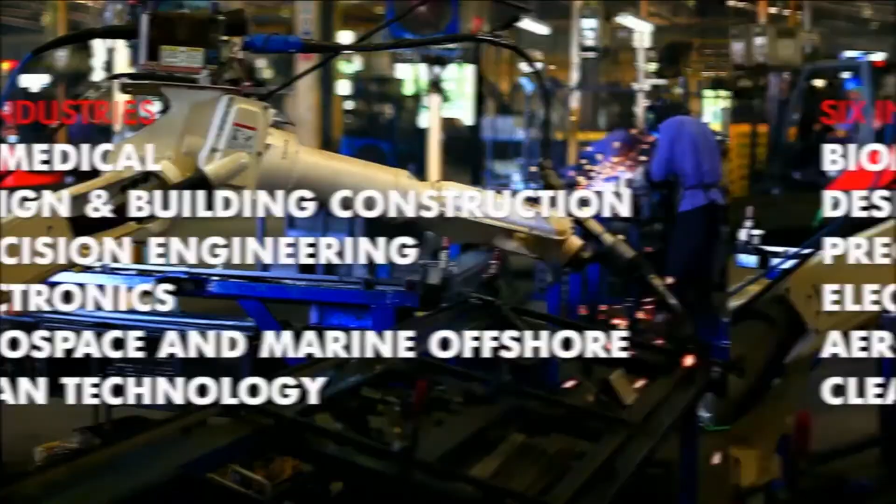What we're working on is developing new materials, new ways of printing, and designing these materials to suit your body part, and then training the doctors to put them back into your body.

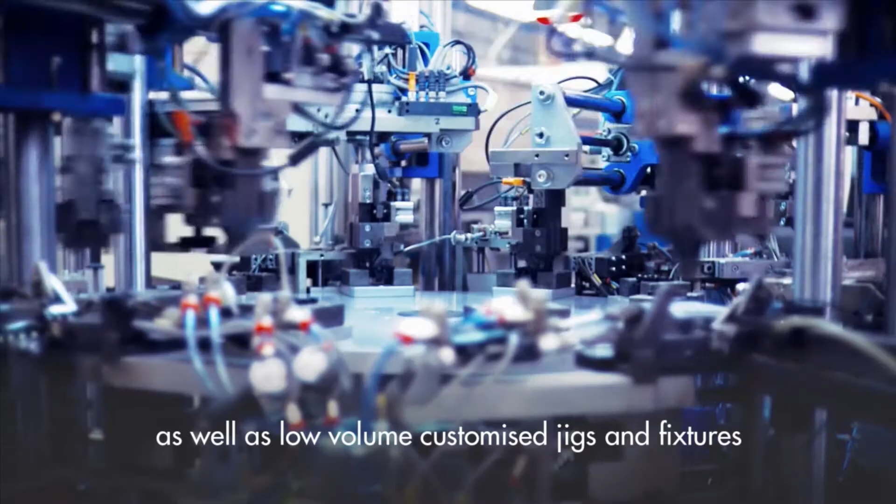AM can be used to make injection molds with conformal cooling channels, as well as low-volume customized jigs and fixtures.

We have already seen door brackets which have been 3D printed and used in aeroplanes. We will also see fuel nozzles that will be used in aircraft engines.

An exciting development is the development of hybrid technologies. This is a combination of both additive and subtractive-based technologies, such as milling.

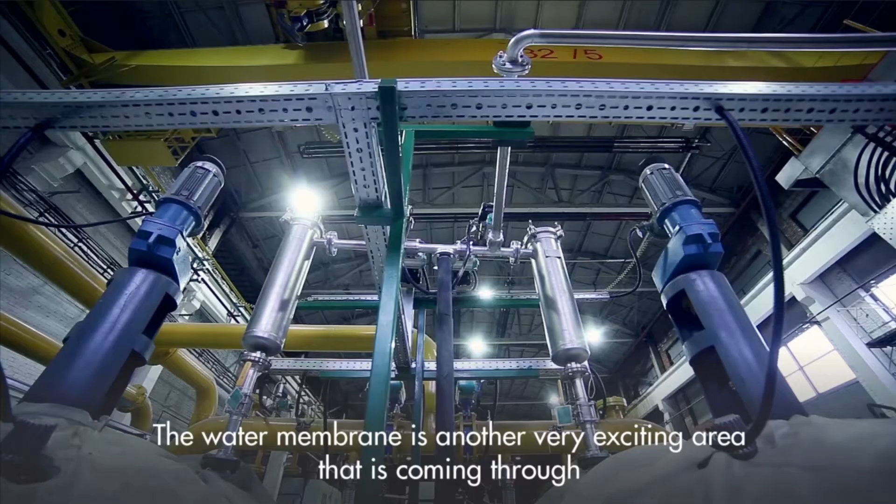Solar panels and wind turbines are some of the emerging applications with AM in the clean technology sector. The water membrane is another very exciting area that's coming through.

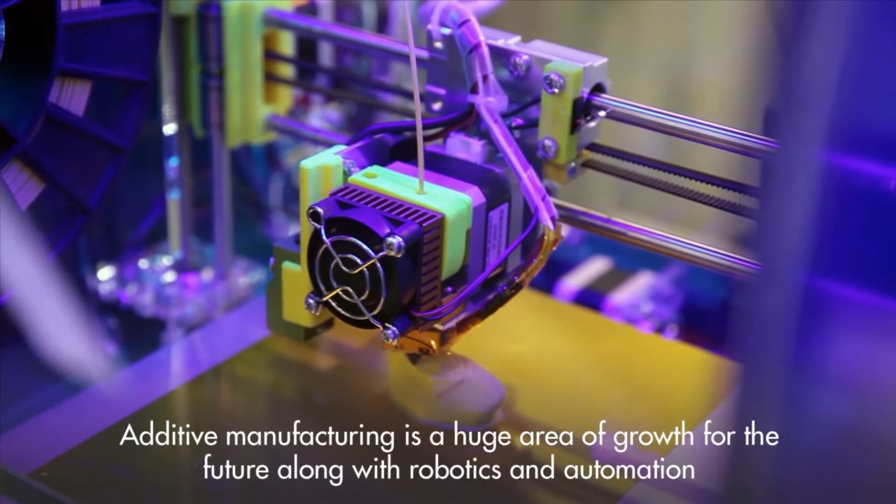Additive manufacturing is a huge area of growth for the future, along with robotics and automation. In Budget 2016, the government announced the Industry Transformation Program. Additive manufacturing, automation, sensors, analytics—these will be the enablers.

AM is identified as a disruptive technology. It has the power to impact lives, businesses, and the global economy. It is a game changer.

The current market size is about 7 billion, and we should see this number triple by the year 2020 to 21 billion.

The AM ecosystem, as we see it, is made out of three main parts: universities that are training students for working in 3D industries and do research; corporations that do prototyping work, actual parts, and scale-down models to train people; and individuals that take advantage of the fact that 3D can do small quantity productions.

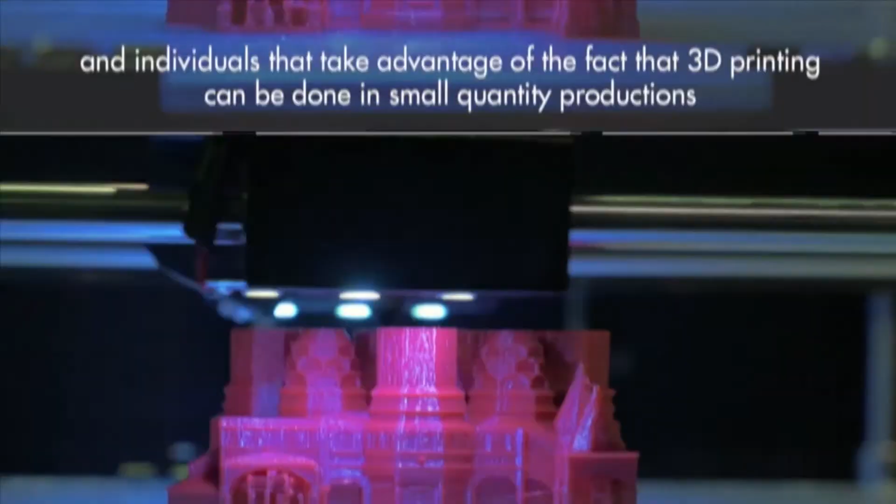It's critical selecting the right applications that are technically feasible and economically viable, then having a workforce that is able to collaborate and innovate to create new applications and solve the challenges.

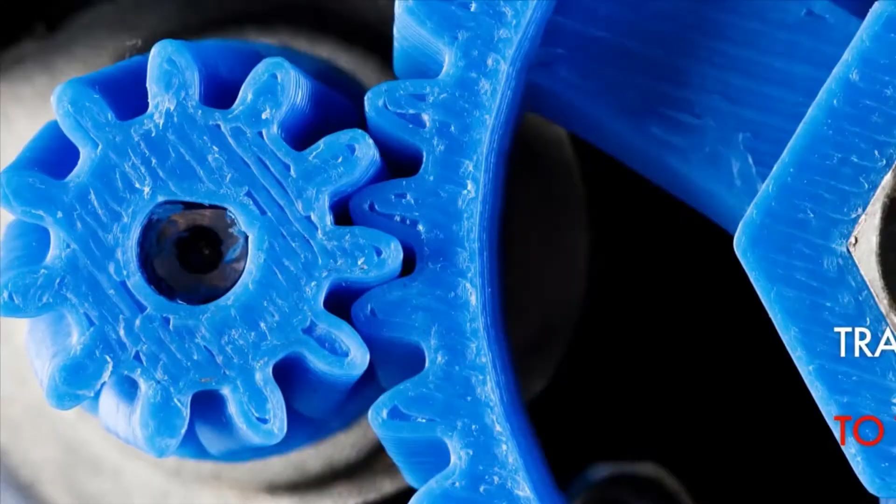We want to help companies translate their technologies into viable commercial solutions. We do this by partnerships, seeding capabilities, and skills training to position them well into the next industrial revolution.

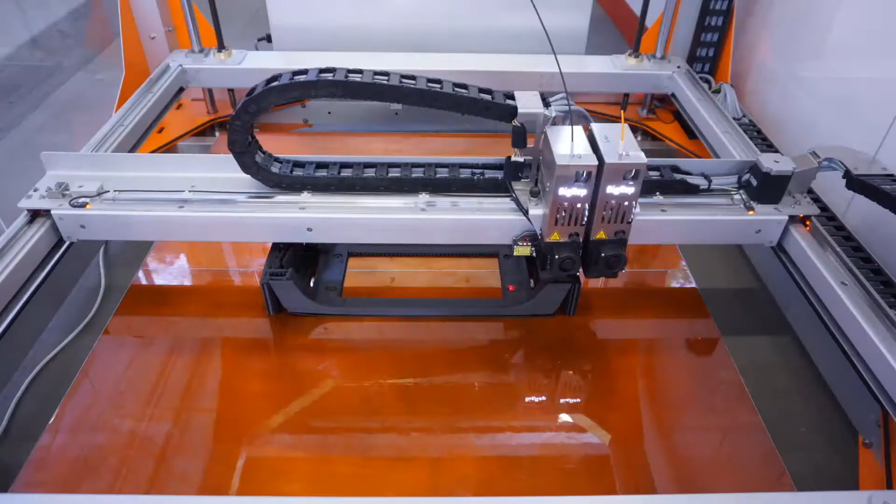What we sometimes need are spare parts which come from very old trains. Instead of investing a huge amount of money in huge warehouses, we are now able to 3D print spare parts on demand.

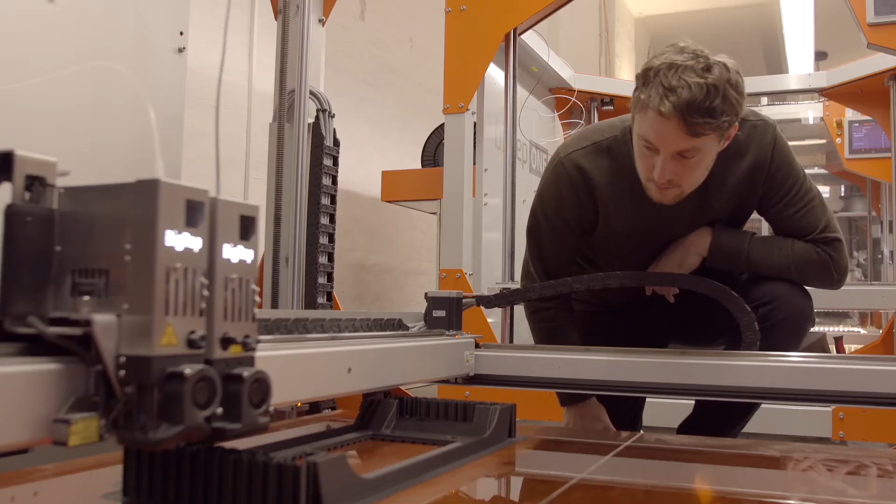We need very special materials which have to be flame retardant, and our levels concerning flame retardancy are very high. So together with our material specialists, we are focusing on creating a new material that enables both rigidity and flame retardancy in one go.

In order to assure its neutrality, Deutsche Bahn has joined as an equal founding member of Mobility Goes Additive, and has aligned the network based on their needs.

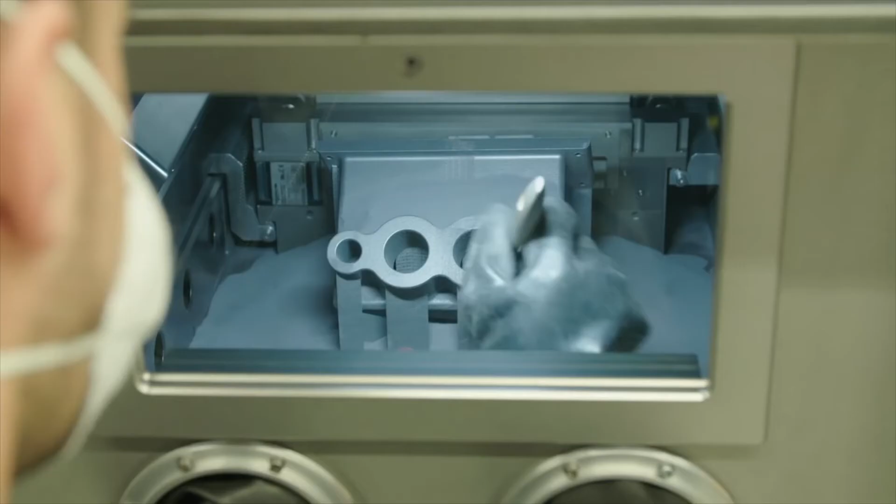I'm happy to sign an MOU with NAMIC today. We consider NAMIC as the 3D printing network not only in Singapore but also in the Asian market. And this is what our 99 members are longing for.

Just last week we initiated the next network, which is called Medical Goes Additive. So with two networks we want to enhance the possibilities of additive manufacturing throughout the world.

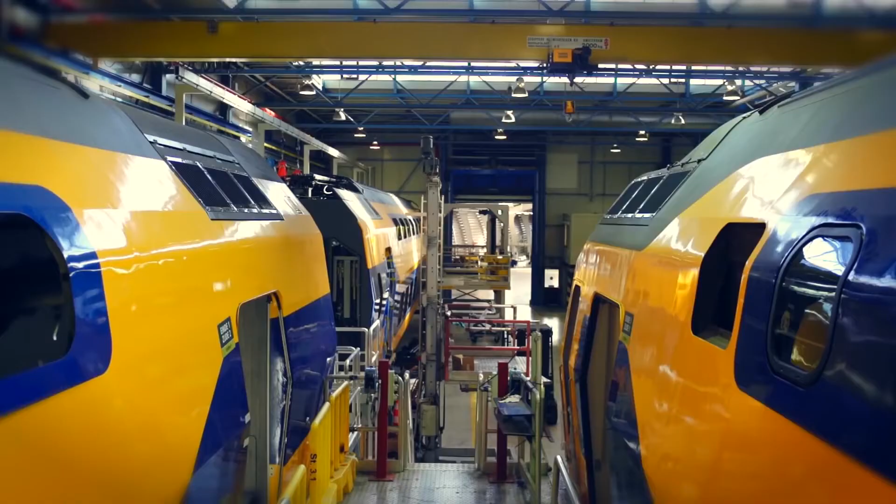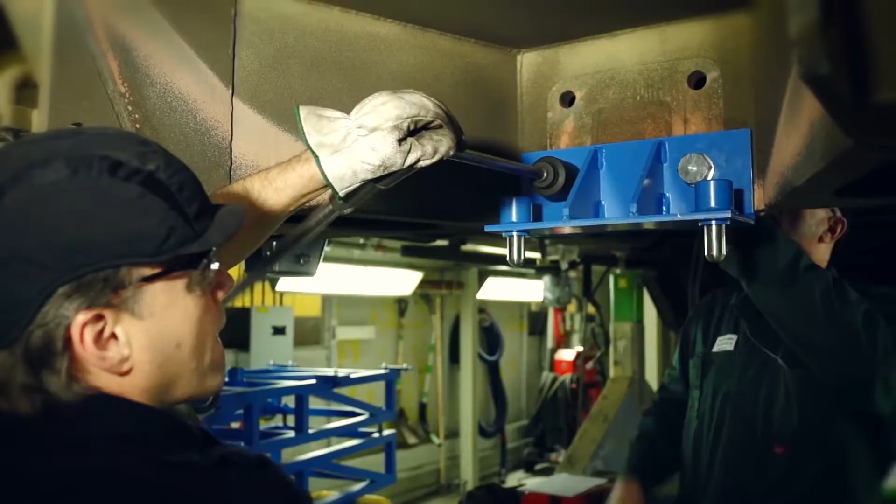Om onze reizigers een goede, comfortabele treinreis te kunnen bieden, schaft NS nieuwe treinen aan en moderniseert bestaande treinen. De eerste generatie Intercity dubbeldekkers, de VIRM, rijdt alweer 20 jaar rond. De monteurs van NedTrain in Haarlem gaan alle VIRM-treinstellen volledig moderniseren.

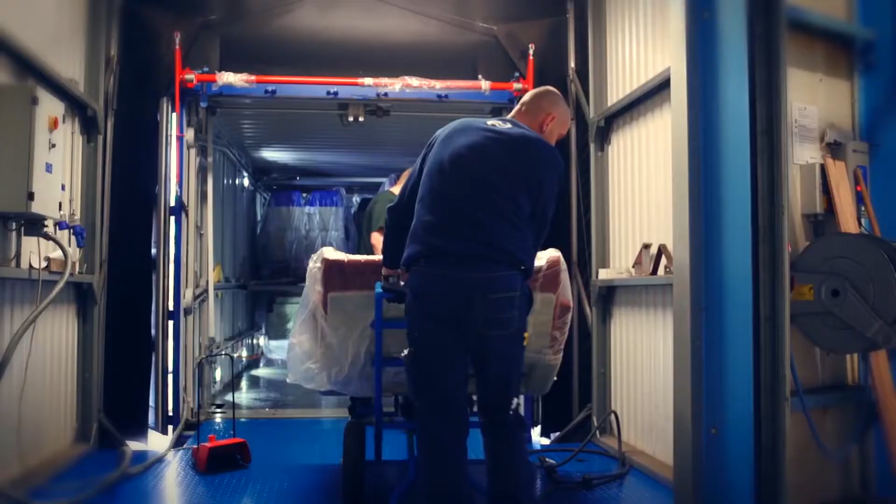Aan zo'n grote operatie gaat een intensieve periode van ontwerpen vooraf. Daarbij wordt nauw samengewerkt met leveranciers en de afdeling die de ombouw uitvoert. We bouwen daarbij voort op de inzichten van een succesvolle eerdere modernisering van dubbeldekkers.

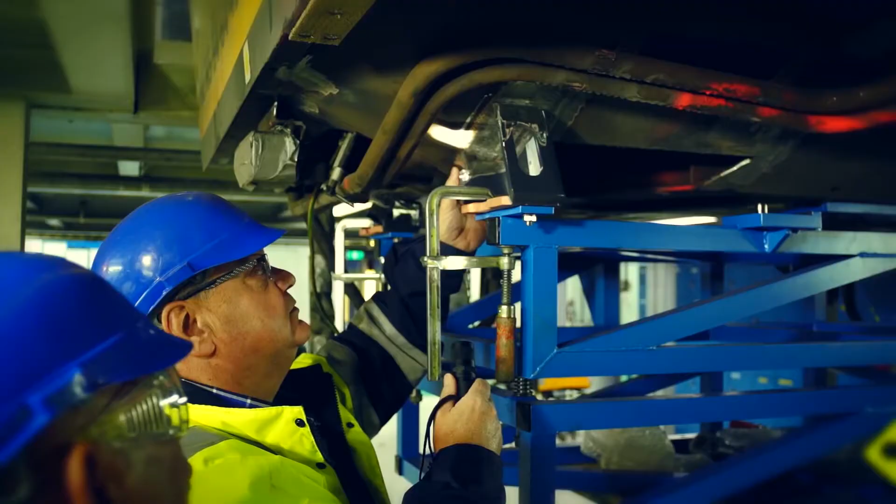Voordat NedTrain de VIRM-treinstellen in serie gaat ombouwen, starten we eerst met de ombouw van 1 trein om die te testen in de praktijk. Engineers, kwaliteitsmensen en veiligheidsmensen werken samen met monteurs om het ontwerp en de ombouw tot in de kleinste details in de vingers te krijgen. Daarna kunnen we alle andere 412 rijtuigen onder handen nemen in serieproductie, net als in de auto-industrie.

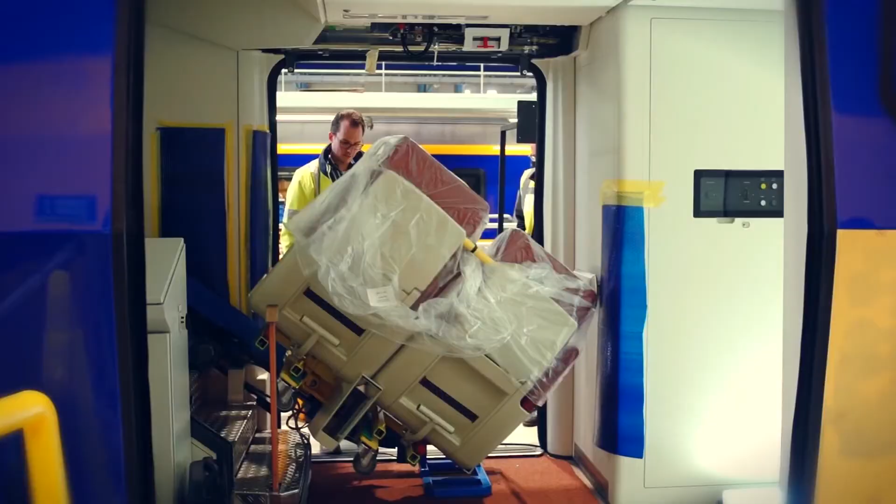Er is speciale outillage ontwikkeld die de inbouw zo snel en veilig mogelijk laten verlopen. De monteurs vernieuwen de ramen, het interieur en de toiletten volledig. Een deel van de VIRM wordt hergebruikt, zoals het balkon.

Door de modernisering wordt de trein ook weer zuiniger en duurzamer. Bijvoorbeeld door verlichting die zich aanpast aan de hoeveelheid daglicht.

Het bovengedeelte van de geheel vernieuwde trein leent zich door de inrichting wat meer voor rustig lezen of werken. Hier bevinden zich dan ook de stiltezones. Het benedengedeelte kent meer banken tegenover elkaar, loungebanken en extra bagageruimte. Kunst in de trein complementeert het geheel voor de reiziger.

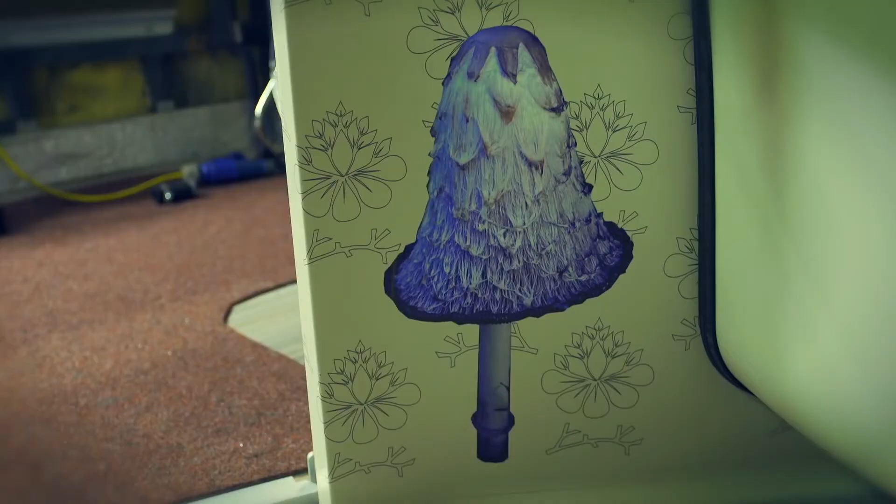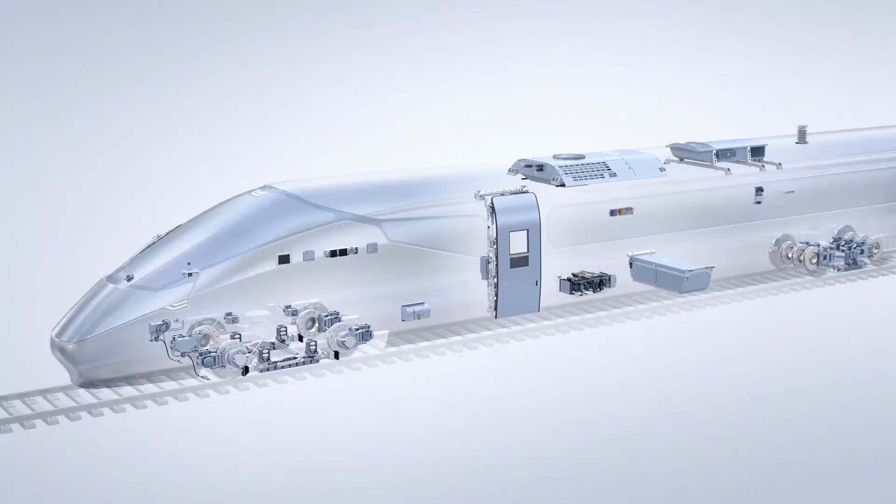Knorr Bremse is the world-leading manufacturer of proven braking technologies. Over the years, the company's highly integrated systems for the intelligent control and regulation of dynamic braking forces have been installed in thousands of trains.

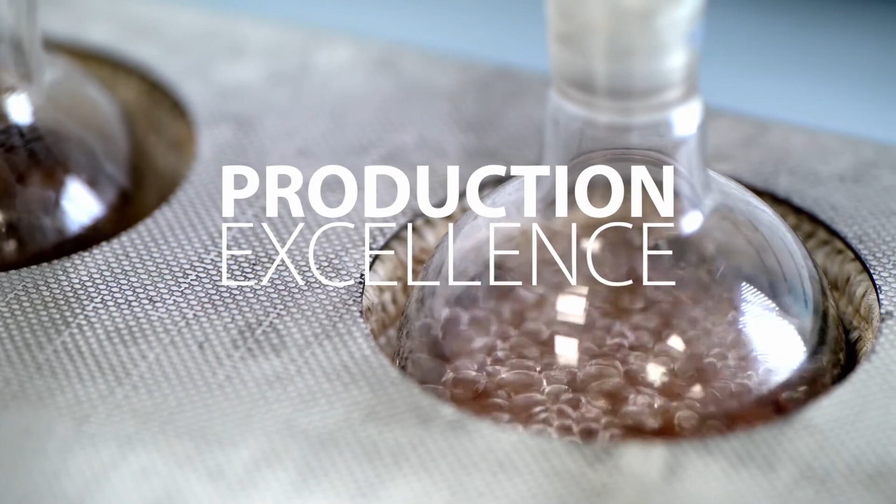With the system competence and global know-how of Knorr Bremse, Friction Technologies provide the most comprehensive, individual, and suitable offer of friction products for all train applications. With one of the world's broadest portfolios, Knorr Bremse assures high-quality products for every application.

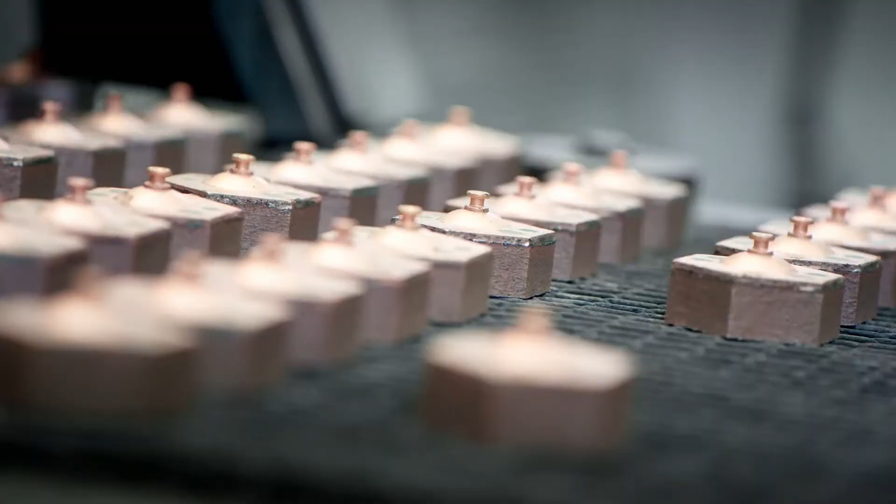Our facilities are equipped with the latest production technology to ensure high-quality, reliable, and highly available products. A continuous investment in increasing capacities is Knorr Bremse's promise to the customer for uncompromising availability of spare parts. In-house production and supply chain excellence are key benefits for customers.

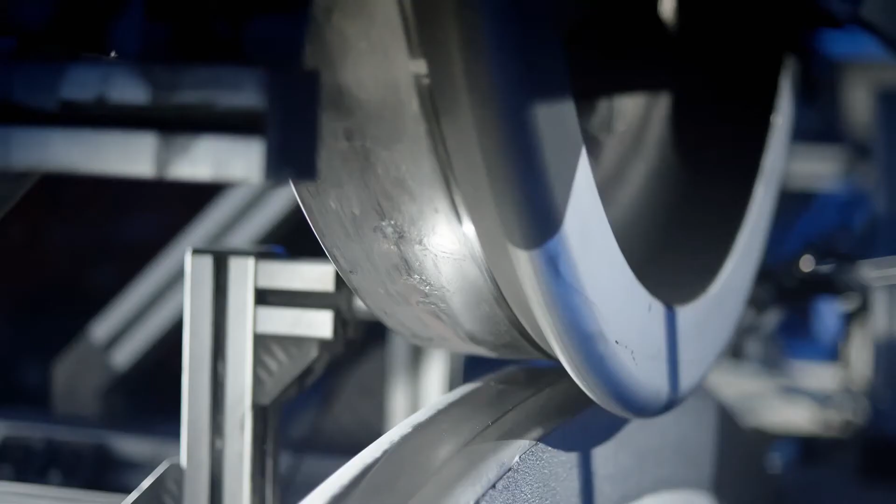Knorr Bremse has the capability to provide customers with an individual selection of brake discs and brake pads that significantly influence life cycle costs. This guarantees high flexibility for customer requirements and a short lead time.

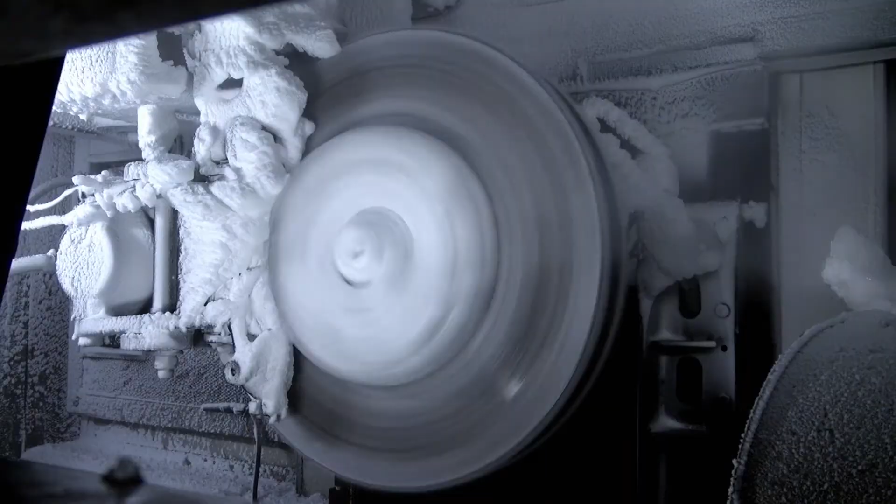Hundreds of service-proven friction pairing variations allow us to offer the most suitable solution for each and every customer. Our state-of-the-art testing and analysis facilities allow measurement of friction coefficient, temperature, wear, and noise. Testing is done under extreme climatic conditions and speeds of up to 520 kilometers per hour.

This testing excellence allows Knorr Bremse to close up the cycle for every customer application, with the assurance that the most reliable, most cost-efficient, and sustainable system has been designed. Our qualified sales specialists and the worldwide service team strive for a long-lasting partnership with our customers, no matter the application.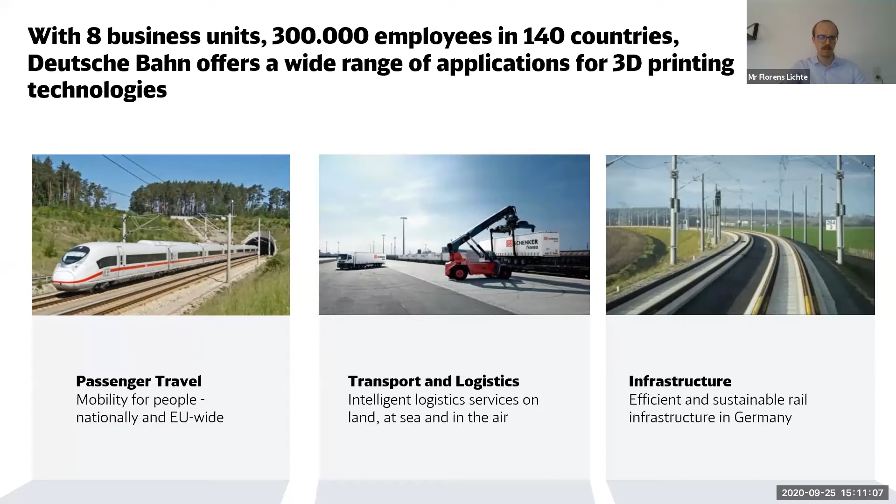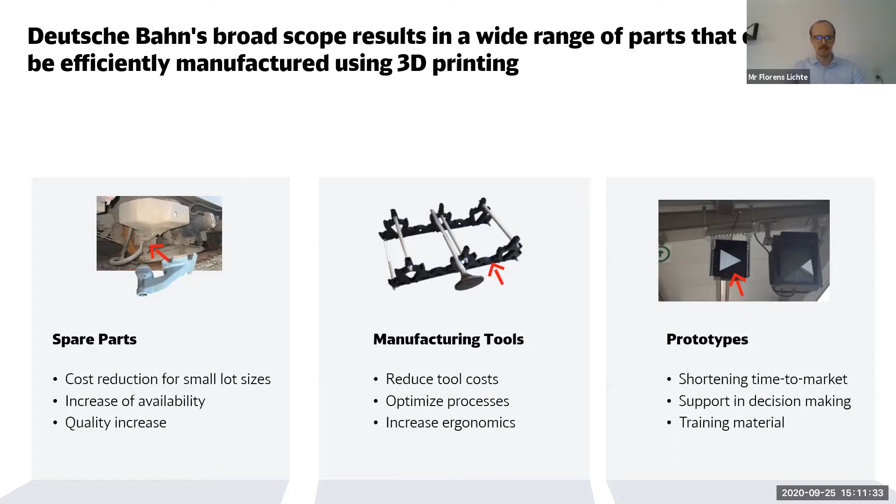Our main focus is spare parts, because we want to increase the availability of our assets, but we are also developing manufacturing tools for our own maintenance processes. We have over 100 different maintenance sites all over Germany. And of course, we are also printing prototypes for new components that need to be tested, like in the image you see on the screen.

What's our mission? As I said before, we want to increase availability. So we're talking about parts that are no longer available from the market, that are not used anymore by the original equipment manufacturer, or parts that are really hard to procure, where we have long lead times. And in many cases, it's also a measure of cost reduction — we want to reduce the cost for small lot sizes.

As you might imagine, in an industry like ours, it's also very important to establish standards, especially when we're talking about a new innovative technology. So we also want to drive the establishment of standards within our industry. We are pushing certification together with other partners like TÜV Süd, and we're also working on standardization committees.

For us, it's also very important to consolidate the needs within the railway industry. So we are working closely together with the European railways to share our knowledge, but also to address several market needs to the industry. And as a green company, or with Deutsche Bahn's claim to be a green company, it's also important for us to use this technology to reduce material waste, and of course we can optimize logistic processes by using additive manufacturing.

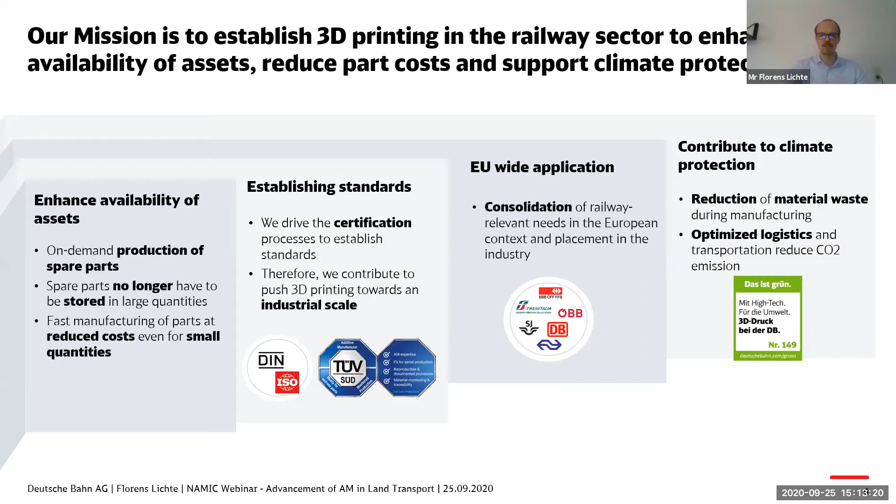Basically, our key approach is a holistic approach to serve all the business units within Deutsche Bahn. So we set up a competence center to develop AM solutions for the different business units — solutions that make sense from an economical point of view, that are technically feasible, and that are also feasible from a legal point of view.

One thing when you start with additive manufacturing is, of course, how do you identify suitable parts? That is key for implementation of additive manufacturing. When we started back in 2015, we started, like many other corporates, with a top-down approach. We looked into our ERP systems, defined some criteria, analyzed these parts, and tested them for feasibility. But this didn't really work out for us because we didn't have sufficient data in our system.

So we switched to a bottom-up approach. Over the last few years, we did over 100 workshops and trainings with our colleagues in maintenance, but also at other DB sites. We showed them what the technology can do, how it's working, what other industries are doing, what is best practice, and what we've done so far. And then we got some thinking, and we worked with their specific needs, their problem parts, testing them for feasibility, printing first prototypes, and then qualifying the application. This worked very well over the last few years.

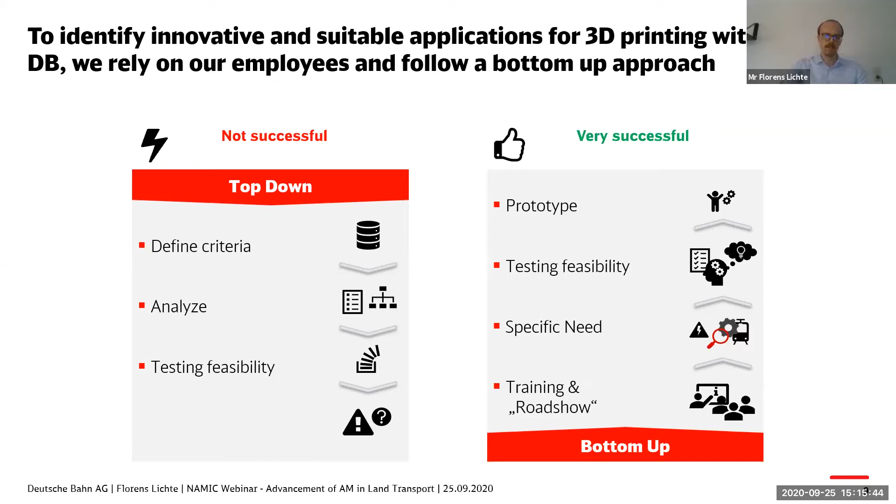Right now we're getting 5 to 10 new ideas every week, so that's quite good. Last year we started with a tool to interact with our colleagues, so they can submit their idea or their need through this tool. They're asked to fill in some basic data on the part so we know what we're dealing with. They can upload a photo, they can upload technical documentation, and then there's a first evaluation of the part by the system, checking if it's technically feasible and if it makes sense from an economical point of view.

Currently, we are also using this tool within our second employee competition. This year it's an international, DB-wide employee competition, and our colleagues are asked to submit their ideas in 4 different categories: new parts, parts that need to be optimized, parts that are copied one-to-one, and a fourth category for other ideas that don't fit the other three. So far we've been very successful, collecting over 100 ideas—currently around 120. This will go on until the end of September, and then we will choose the winners.

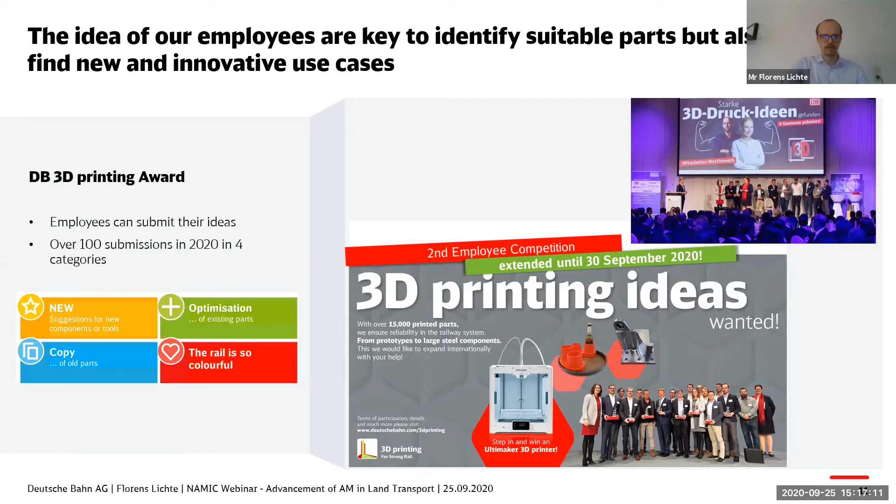As you see, we try really to spread the knowledge about 3D printing across the country, across the whole company, so that we get the knowledge to our people. Another means is, of course, training. In the last years we also developed several training programs, starting with a basic training, then training for more advanced people, and then a dedicated program for our colleagues coming from the apprenticeship.

Last year we also started installing desktop printers at our heavy maintenance sites, so that every apprentice can print some parts throughout his time in the apprenticeship. And of course, we also have tailored workshops for specific groups within DB.

But let's look into the applications, what we've done so far. I have some examples that we implemented in the last years. One of our biggest AM applications are these handrail signs. You find them at every station, and basically they indicate the way for visually impaired passengers. They totally make sense from an additive manufacturing perspective, because no two plates look the same—every station has its own platform arrangement. Then you have street names, like in the case here, on the upper plate. So every sign is different, which makes it ideal for additive manufacturing. We've printed over a thousand of these plates so far, and it saves us a lot of money.

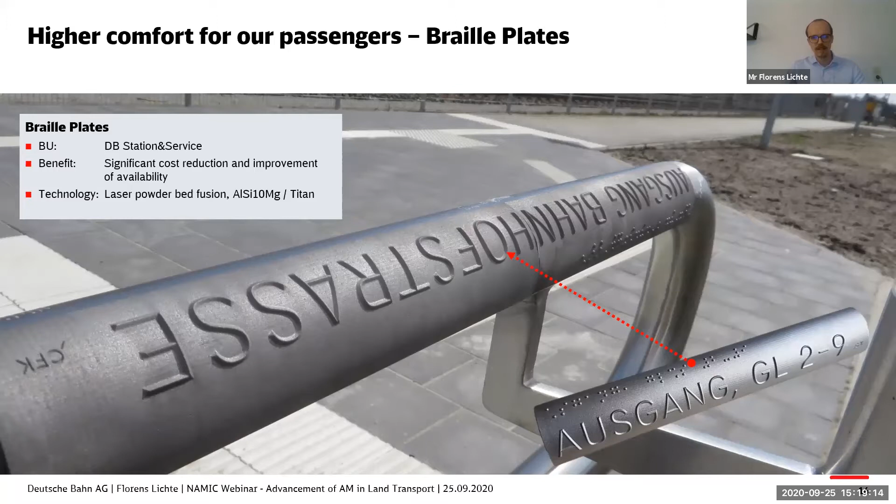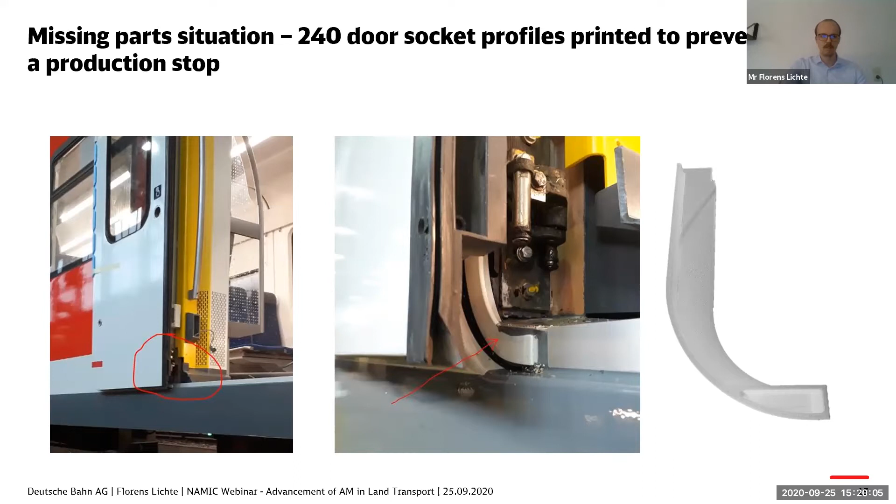As I said in the beginning, one of the main drivers is increasing availability for our assets. Here's an example of a small plastic part: a door socket profile that was missing during the redesign process of this suburban train. The issue was that the original supplier wasn't able to deliver this part in a timely manner, and we would have had to stop production because we were missing it. We were able, with additive manufacturing, to supply 240 parts within 10 working days without any production stop. This was a huge success.

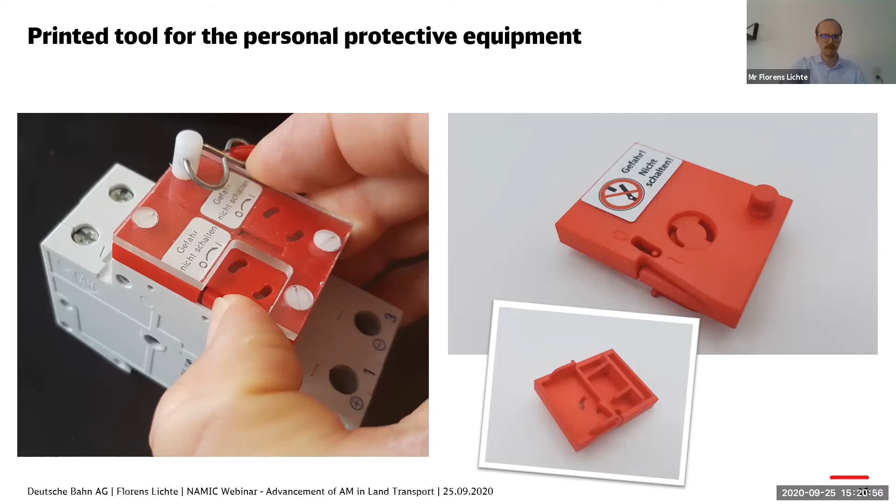This example is one of our heavy metal use cases. Beginning of last year, we had an issue with two of these parts called secondary roll stops. They're bolted underneath the car body of a high-speed train, and they limit the lateral movement of the car body relative to the bogie.

This issue resulted from an accident repair. So we had to fix an accident repair on a vehicle, and this is a part we normally don't have on stock, since it isn't meant to be replaced during the regular maintenance schedule.

Our option was a quote from the original equipment supplier offering 4 parts minimum order quantity. But we would have waited 10 months to get the parts, and we would have had to pay a serious amount for the initial tooling. So this wasn't an option for us, and we thought, why can't we print this part?

We took a deeper look at the wire arc additive manufacturing technology. We had printed a part using this technology before, so we had some experience with it.

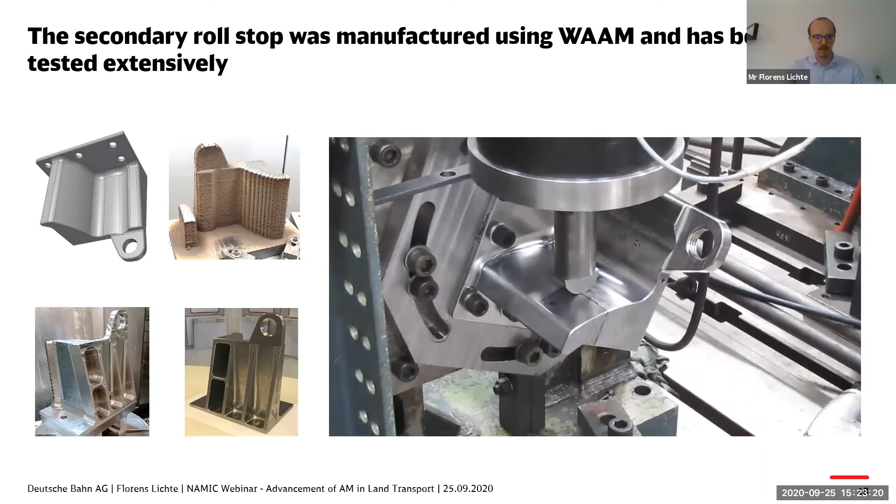This is a part that is really safety relevant, so we needed to make sure it meets all the requirements. As you see on the right side, we did a test with this part under the loading that the part is under during operation, and we were able to simulate 30 years of operation with this test. Finally, the part was good to go into field testing.

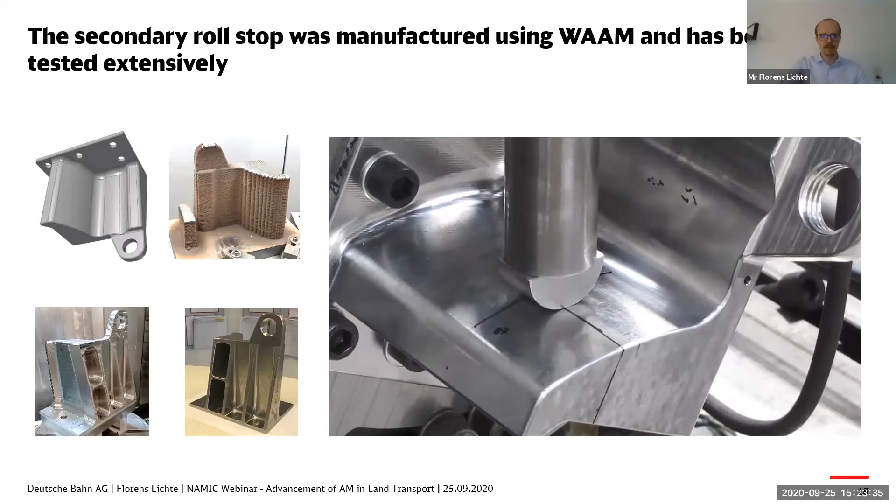But we're not only talking about end-use parts, as I mentioned before. We're also looking into the tooling sector. This is a good example of a simple template that helps the worker apply stickers, for example in this case on a headrest.

You have this pictogram with a seat number that needs to be applied to the headrest, and this template helps them accurately stick this pictogram to the headrest. We have other good examples, like sticking pictograms in the interior of the vehicle, and this saves a lot of time. So this was really good process optimization.

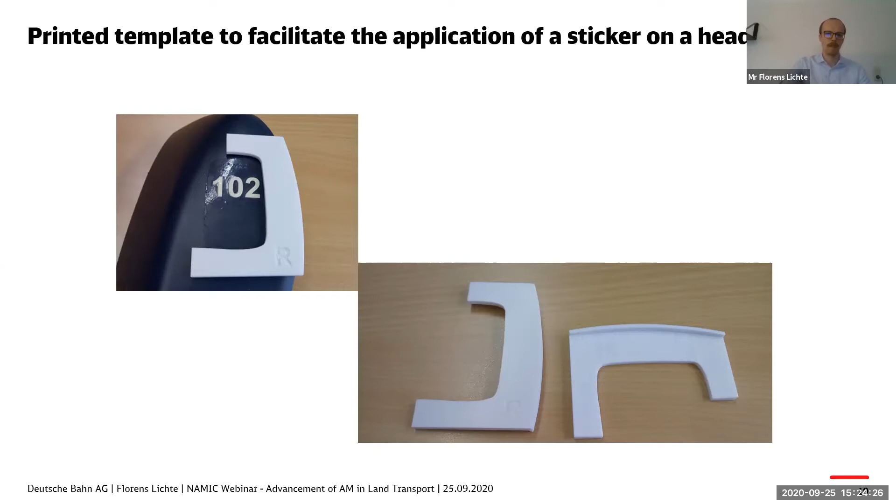We're also not only considering printing polymers or steel parts, we're also looking into printing concrete. This is a good example from the Netherlands, a printed staircase. That's also something we're currently looking at and will evaluate in the future.

So I hope I could give you a good impression of what we are doing so far, what challenges we are facing, and I'm looking forward to your questions later on.

Right, thank you so much, Florens. I'm actually looking forward not only to the questions, but also to the winners from your Deutsche Bahn competition that you've been running. Last year when I was in Germany we heard about it, and I think you and one of the winners you shared previously was really good. So this year's list of winners and the competition entries will be very interesting to look forward to, end of September.

Okay, Dutch Railways - I saw the video at the beginning, but it was all in Dutch. So maybe I'll quickly introduce the Dutch Railways with this funny slide.

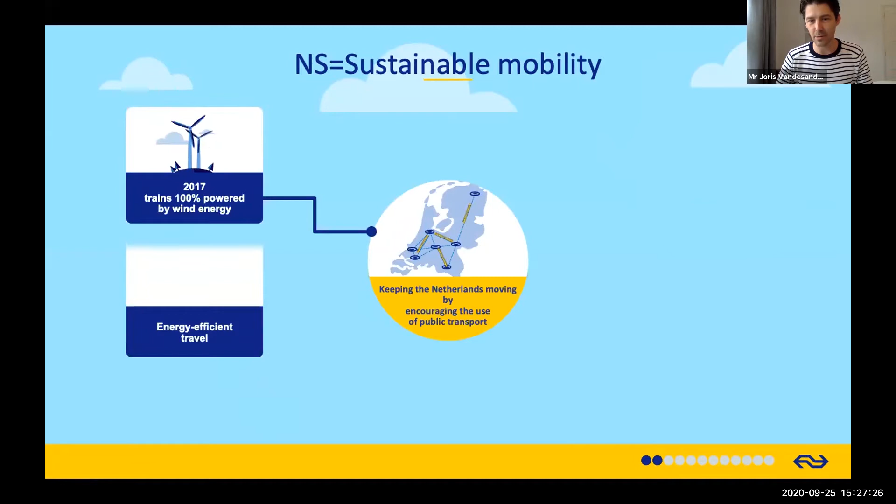As already told in the introduction, NS really focused on sustainability. Already in 2017, 100% of our trains are running on green energy from windmills. Together with our energy supplier, we built a windmill plant which provided enough energy for the whole Netherlands, for NS in total. I think NS is one of the few who's totally running on green energy.

Besides that, we are a green country because we use a lot of bikes. So from getting from the train to your location, you can use bikes. We have a lot of bikes standing at the stations which can be rented by our passengers.

And this is in a nutshell, I think, the mission of NS: to have a green, sustainable mobility approach. I think this is also a link to additive manufacturing, because that's a green production as well, since you don't use that much energy. Yeah, there's not that much waste in production. Also, as I'll tell you later on, it's focusing really on printing on demand, so you don't have that money stuck at our place or at the supplier, and that means less transport. So all kinds of benefits which also benefit a sustainable approach.

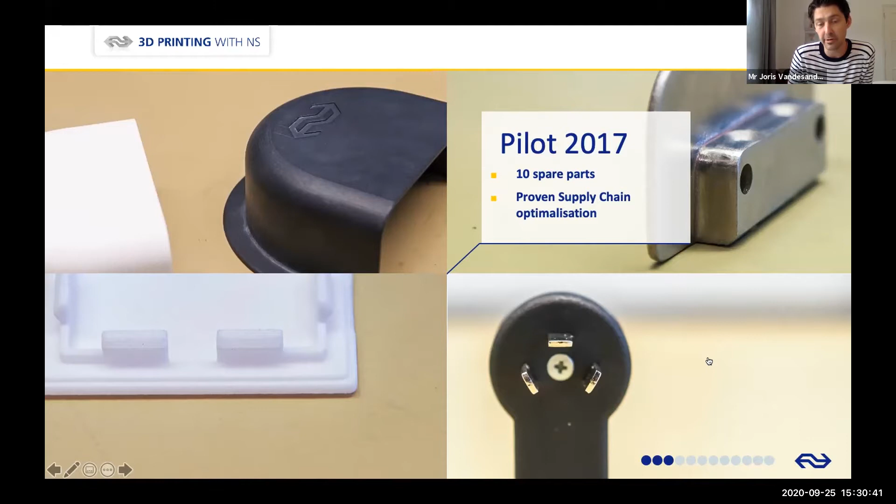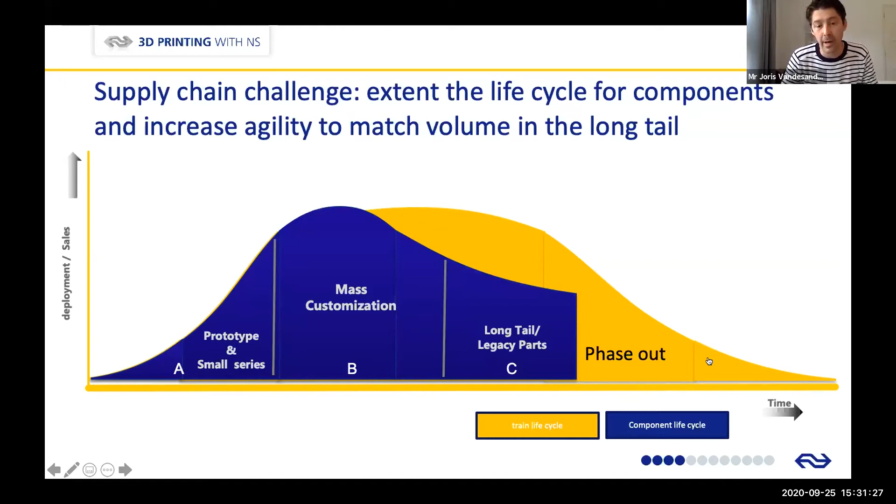A train runs for 30 years or maybe sometimes longer, and especially in the phase out, and already before that, we get problems with availability of spare parts. We see high MOQs, minimum order quantities getting up, lead times get longer, and sometimes suppliers don't produce it anymore. That's where the business case of additive manufacturing plays in.

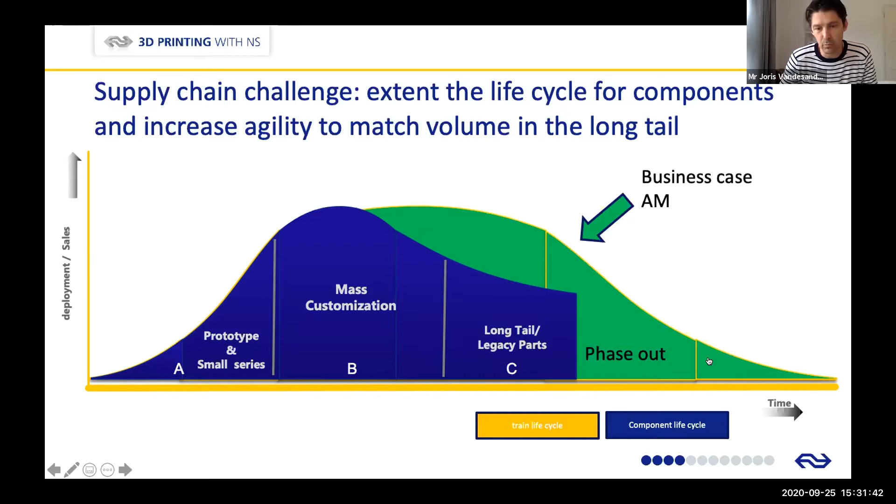Now I think Deutsche Bahn has a similar picture. This is from 2019: we have more than 100 different items printed, or they're indirectly printed using molds which are printed. I think we are now facing around 150 parts.

Because of COVID, it's a little slower, we cannot speed up because we cannot get together and look for new parts. So I think, but still our approach is that we have 3 pillars.

That's building AM knowledge, so we did some trainings, etc., I'll tell you later on. We have partner engagement with our suppliers. We have also been in contact with Knorr-Bremse, Alstom, CAF, and some other small suppliers, to get them on board.

Because we don't want to be a production company, we don't have any printers, we have everything outside. So that's our approach, to get the partners on board. And then what we're focusing on, I think, is creating an AM control center, as I call it. It's a data center to look at data and get the parts selected which can be a benefit for NS. I'll tell you more later on.

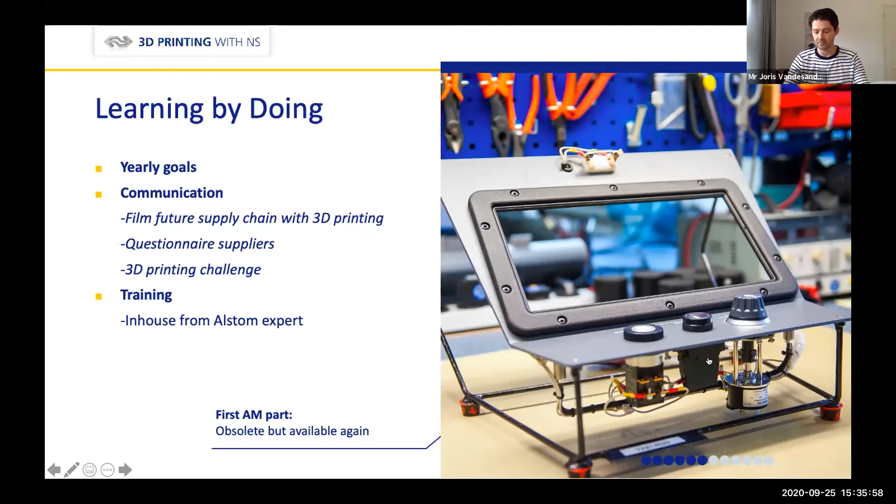Then we have the company Castlab. It's a casting company, and they want to change the whole concept. They really want to focus as well on 3D printing, not using casting anymore, but printing the molds and then at the end normal production of casting components. I have some examples later on.

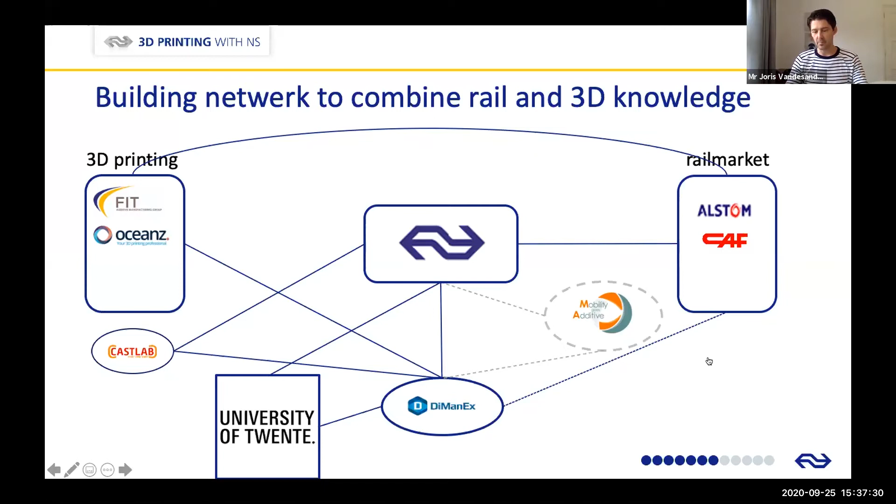The DiManEx platform - our partner has built a platform. What we did was upload almost all our parts which are stock items, 85,000 parts we have uploaded. I think we have the same problem as Deutsche Bahn - there's not always enough information with that, but we try to manage this and add information to it so that we can select based on the parameters which are available, selecting parts.

In the beginning, we started with use cases from the floor, but we are now moving to a more data approach. This is also because of COVID - everybody had to stay at home, and we couldn't do workshops anymore. So the focus this year is really on a data approach. We are really selecting parts, digitalizing them first, and then from there selecting again parts which we can produce samples for.

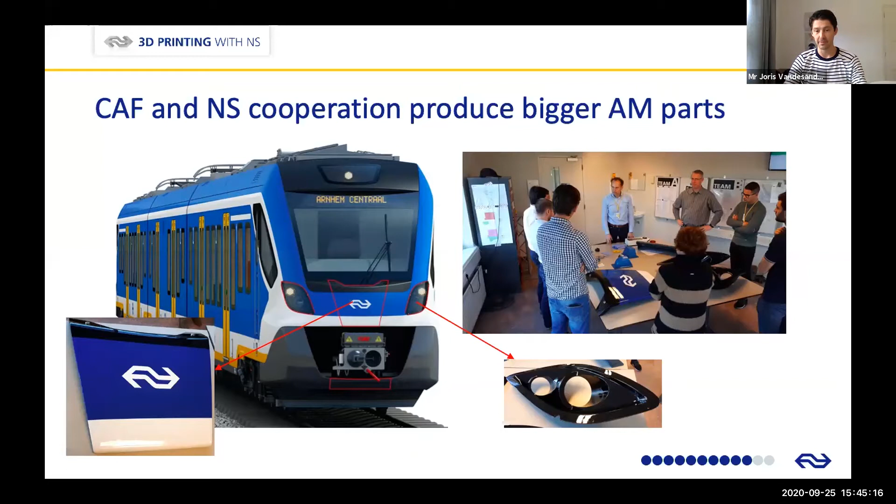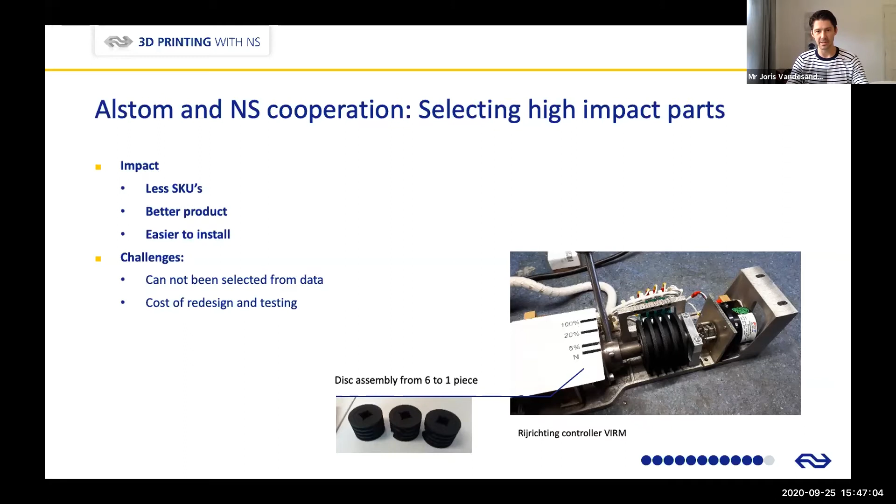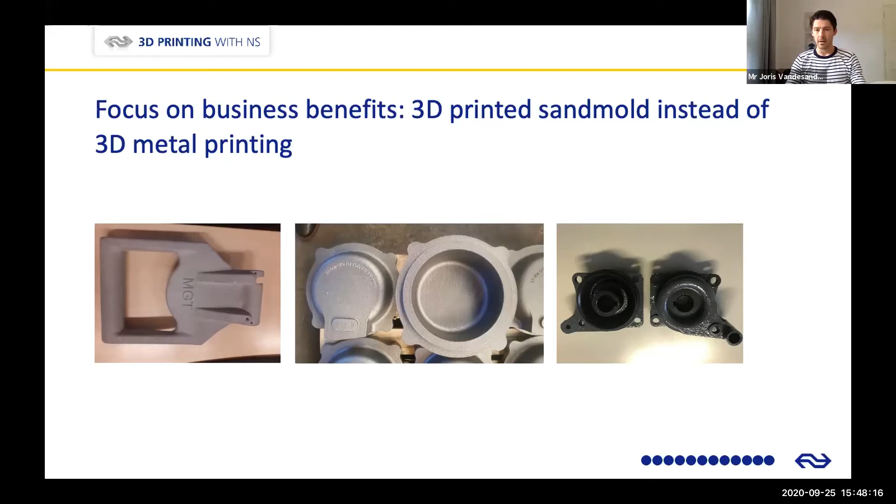Okay, this is where we are now, focusing more on data and selecting parts for the future. Thank you very much.

Thank you, thanks so much Joris. Very insightful, interesting to see that you've built a real nice network of partners from service providers and material suppliers, all coming together. It's amazing to see that you've printed more than 150 parts that can actually go into use. It's an excellent collaborating network of partners in your AM advancement. Very inspiring for us, and thank you for that insightful presentation, Joris.

So far we've heard from two large railway companies in Europe. Now let's hear from a supplier's point of view, their perspective. And to take us through that is Bernhard Winkler.

He's educated in industrial engineering and holds an EMBA from Technical University of Munich, TUM. In his current position at Knorr Bremse, the world's leading supplier of systems for railway vehicles, he's responsible for the introduction of additive manufacturing technologies as well as digital manufacturing technologies to the workflow. Here to take us into this journey, what they've been doing, is Bernhard Winkler.

Bernhard: Thank you, Mahendra, for the kind introduction. It's an honor for me to present you, or to guide you now a little bit through our perspective on additive manufacturing, and especially on additively manufactured spare parts in the railway industry, from the perspective of a supplier. As you've now heard from the colleagues of the railway operators, Deutsche Bahn and Dutch Railway, whom we also collaborate with, I would like to give you some insights on how we deal, from the supplier perspective, with this topic. So good morning from Germany, or good afternoon Singapore.

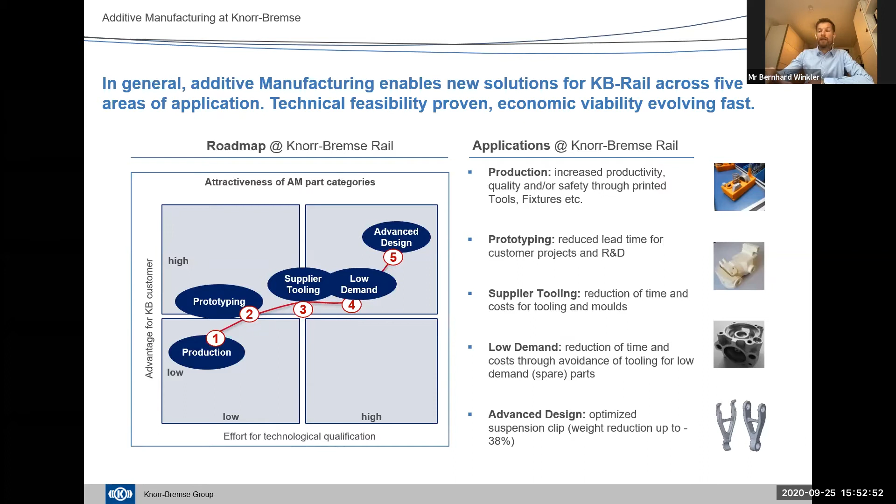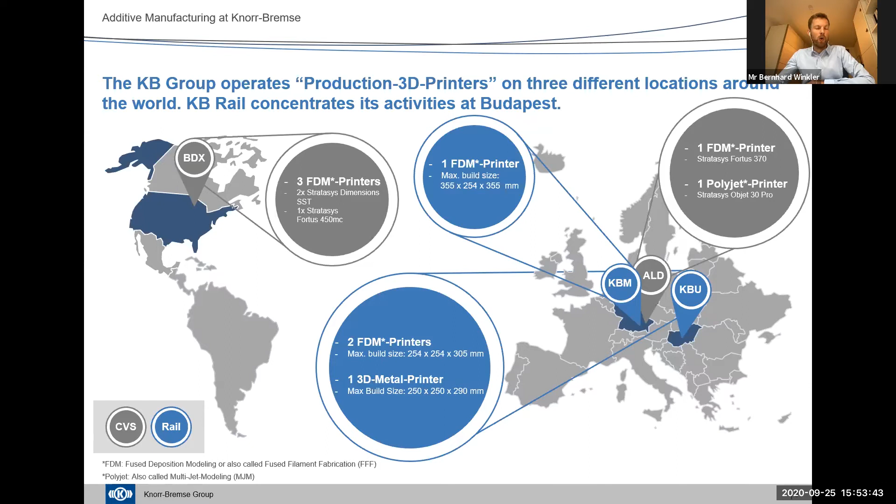I always make the joke that almost every day someone calls me and says, hey, I reinvented additive manufacturing, I have a new technology, do you want to buy my machine? If we would buy all the machines, first of all, the company Knorr Bremse would almost go bankrupt. And we would have a facility of, I don't know, more than 70 different printers standing around with all different areas of application. So obviously that does not make much sense. Therefore, we highly stress the collaborations there.

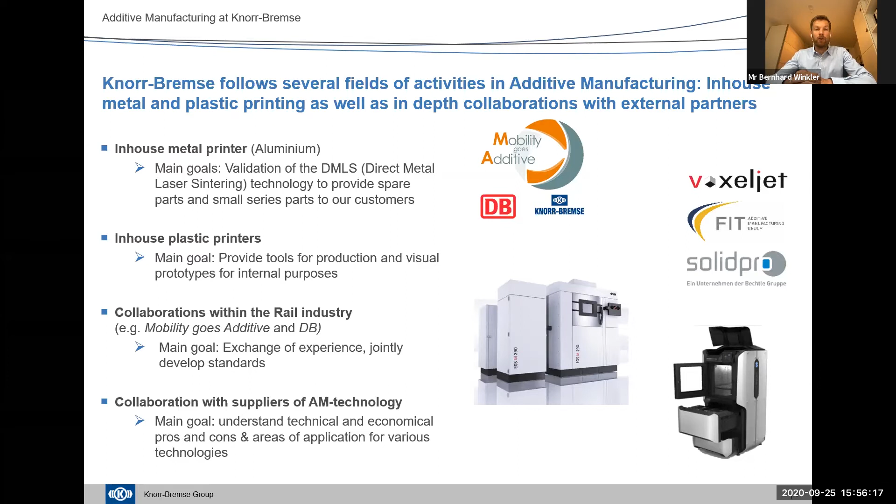And I think everyone who is using that metro, or using a high-speed train anywhere around the world, or a freight train to ship goods, you always wish that the train stops at the very moment it is supposed to stop. That's the core of our business. So we need to ensure that whatever product we bring into the field works exactly as it was engineered for. And for this new manufacturing technology, we need to ensure exactly that. So we have to set high standards before we bring any products into the field. We started intensively with printing prototypes and case studies to gather first experience.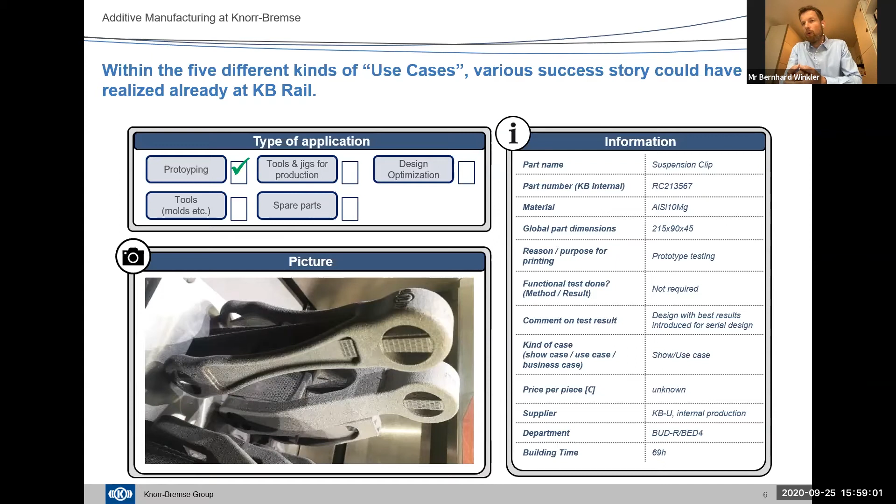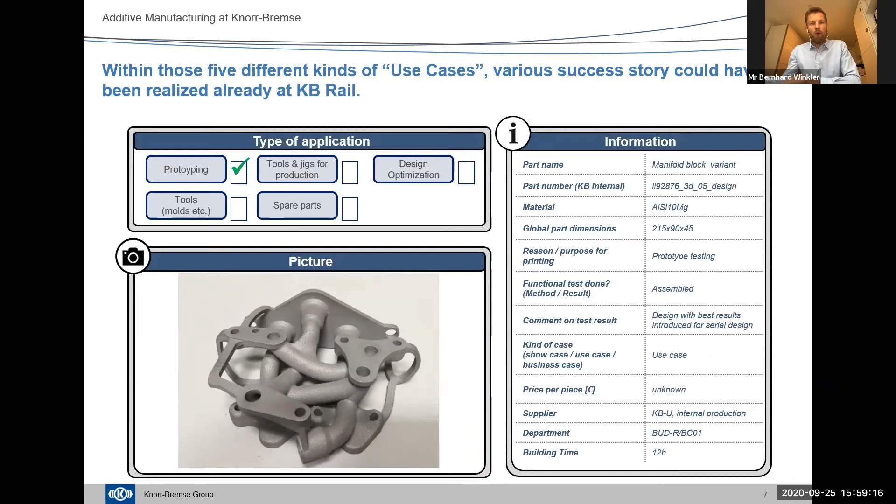If we skip to the next slide, you can see another more sophisticated product, an essential part of a brake system. It looks like a knot, rather complicated, but if we turn the page for one more slide, you can see more insight.

That's where the magic happens, where there's huge potential in the market. Nevertheless, for the moment, I think the whole industry needs to focus first on gaining more experience and bringing products, especially in the spare part or low demand area, into the market.

An essential way how we want to deal with those essential questions that are currently on the table, I will show you on this next slide with the short circle there.

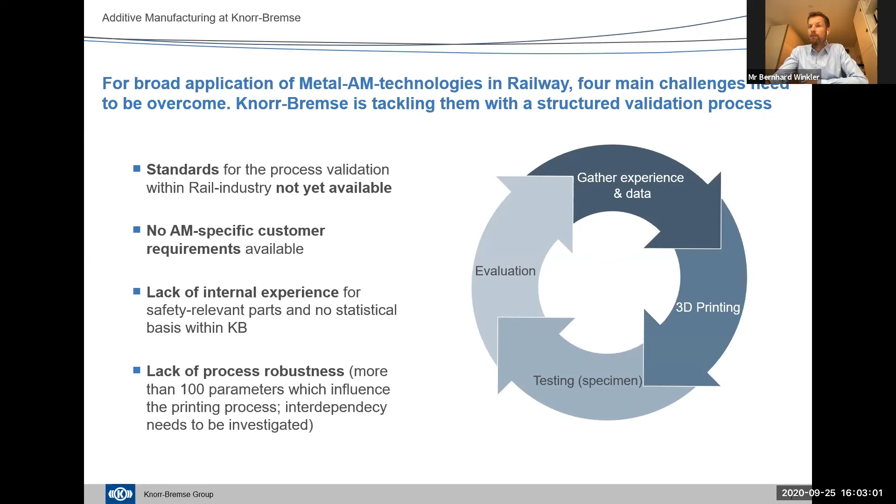I can give some more insight on what we really do in this validation process on the next slide, just a short glimpse - some of the statistical data we need to take and some of the test specimens we need to print frequently. I will not go into technical details, but just to give a short glimpse, it really requires extensive validation and a lot of time and capacity.

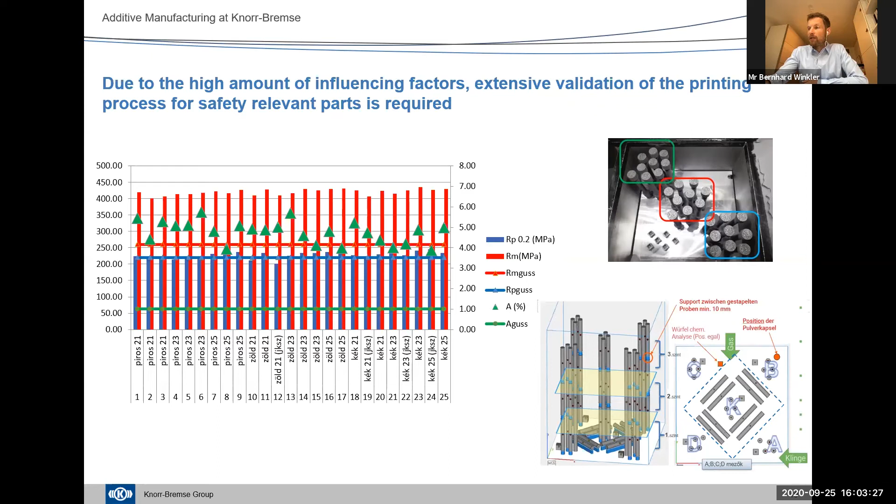Nevertheless, as you can see on our next slide, there is also something interesting we frequently do in parallel, which is analysis from the economical perspective. This is a short trial run or study that we did a couple of years ago.

Back in 2017, to give you some insight, we took a new product or prototype currently in development. We first asked suppliers on our rapid manufacturing shop to produce it with conventional machining. Besides that, we also ordered 5 prototypes from selective laser melting, so additive manufacturing plus additional conventional machining afterwards, in order to get the same functional surfaces.

It was really interesting to take a deeper dive into the business case there, which showed that the economic viability is always something you need to look into carefully. I'm not saying it's only about the price all the time. There are also additional benefits like reduced lead time, reduced total cost of ownership, because you can print on demand and ship it to the customer exactly when he needs it, so no stock keeping, etc. But from the pure printing or cost perspective per part, the discussions usually get somehow difficult.

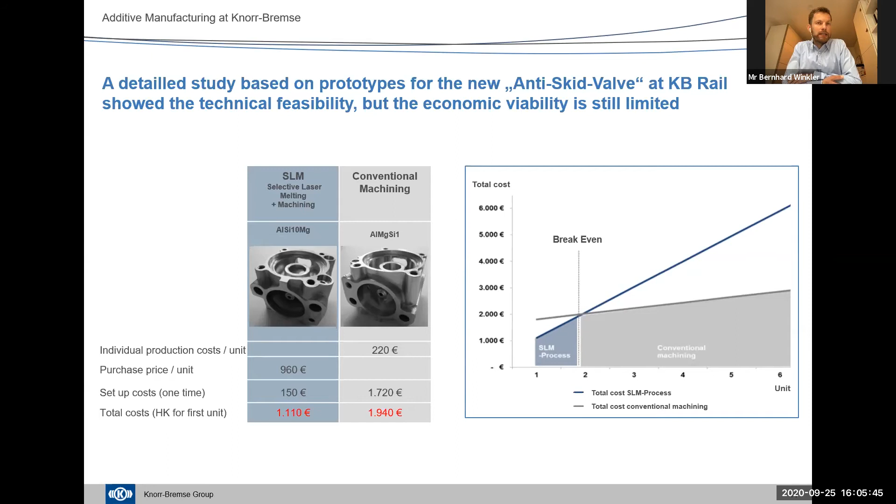That would be my short overview on our supplier perspective. We try to follow that journey along the 5 use cases that I mentioned on the very first slide. For our in-house capacities, we currently deal with 4 challenges that I just described, and we try to deal with those heavily through intensive external collaboration. That would also be my recommendation for everyone starting his journey into additive manufacturing.

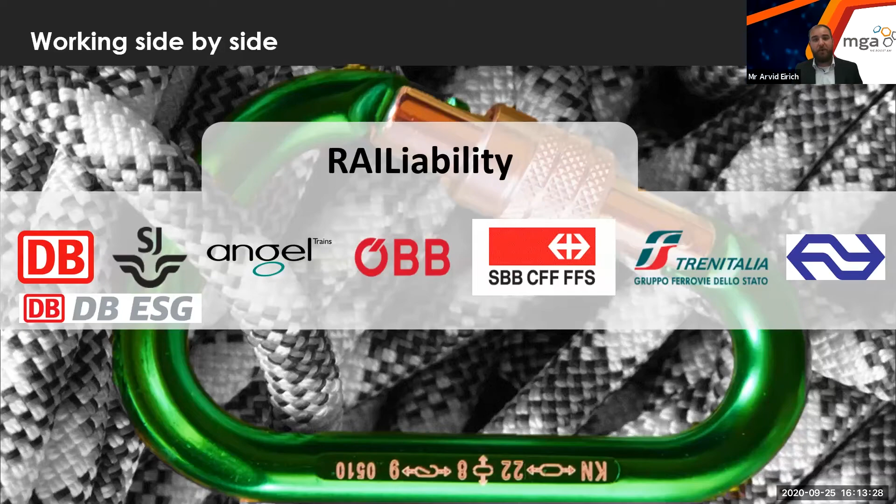They founded this working group in spring 2019, and set themselves the goal for additive manufacturing to work together and develop a joint database for 3D printed parts, where they can exchange ideas and what they have done, so you don't have to make double work. Everybody might have to qualify the same parts, so they can bundle their interests.

Also to exchange experience and values for the identification of components, share requirements for development of a new part, test new materials and technologies together, do research together, and share the outcomes of research in the market, so that they can jointly accelerate the additive manufacturing market as one voice - as the railway industry, wanting to accelerate additive manufacturing.

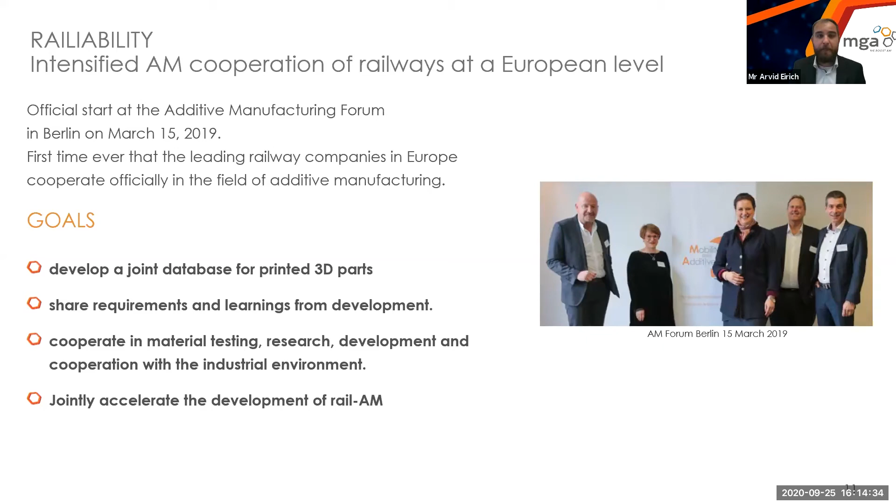So I think the most important thing we hear today is that additive manufacturing is not a technological or economic problem. You hear it today, but you're seeing that there are also solutions. I think the aspect of willingness to change in a company and in a sector is the biggest problem which additive manufacturing has at the moment. So additive manufacturing has shown us what it can and what it cannot do.

We know where we have to improve in this technology, and I think there will be improvements. But in most implementations of additive manufacturing, the topic of change management is a challenge in the company, and therefore we have collected all the stories of different suppliers and users, like Knorr Bremse today, like Deutsche Bahn, also from the aerospace industry, and brought it all into a book.